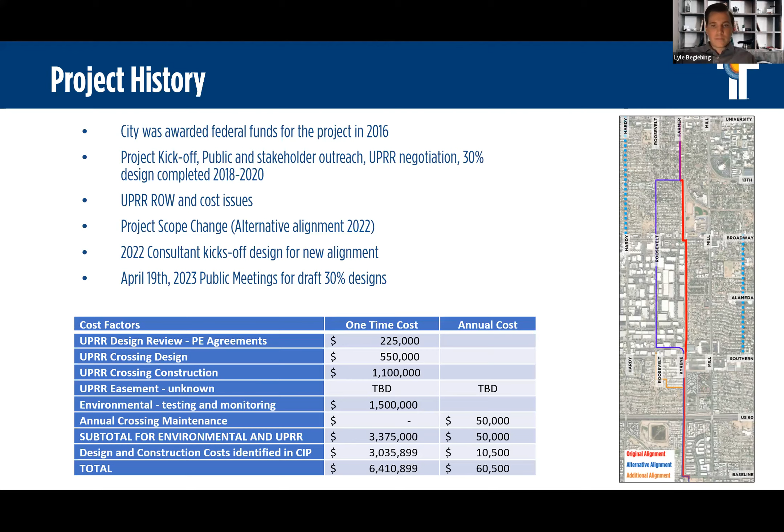Next slide. So here's a general overview of the area this project covers. It starts at University and Farmer on the north end, goes down to 13th Street, and that's where it jogs over to Roosevelt, continues through Broadway and Southern. Below Southern, it will cut through Dwight Park to Manhattan Drive, and through there we'll go back to the original alignment on Kyrene Road.

The southern end of Kyrene, when it hits Baseline, will connect into the Kiwanis Park and Western Canal Path. The proposed improvements include protected and buffered bike lanes, a two-way cycle track on Kyrene, and upgraded bike and pedestrian crossings, as well as a new signal for the crossing on Baseline. There'll be 1.4 miles of new sidewalk where it's currently missing throughout the project, and all sidewalks will be brought up to ADA standards with directional ramps. We'll also include wayfinding signage, as this will be part of the Handlebars Bike Boulevard route, along with landscape and lighting.

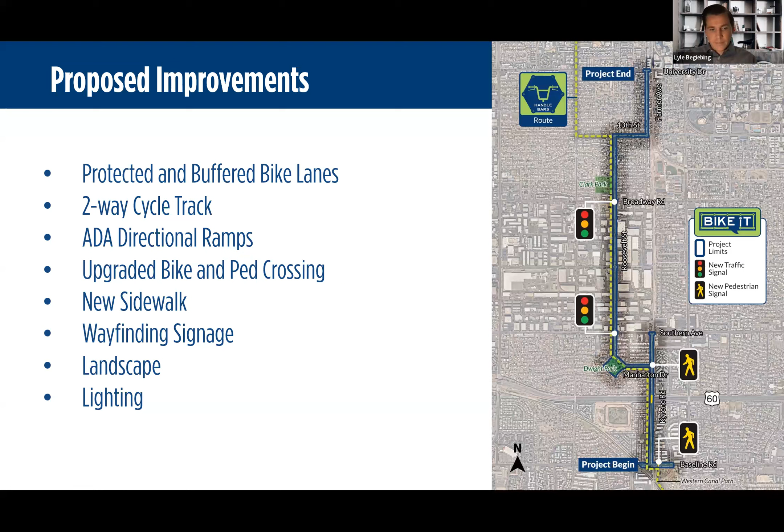Next slide. So the project links many important activity centers and current bike paths and lanes. This will be added as part of the Bike Boulevards route, which is a network of low stress bike routes throughout the city. It'll link Kiwanis Park, the Western Canal, multi-use paths, Clark and Dwight Parks, downtown Tempe, the ASU campus, and will cross the Alameda Streetscape project, currently under construction, which will also feature a pedestrian bridge crossing over the I-10.

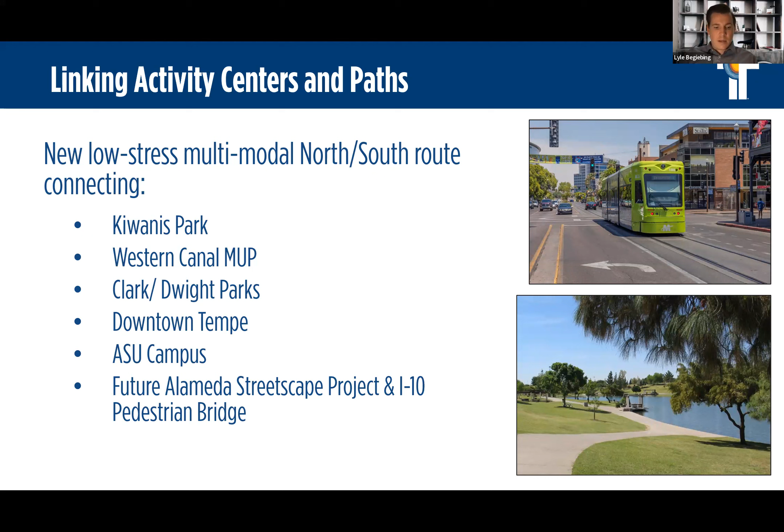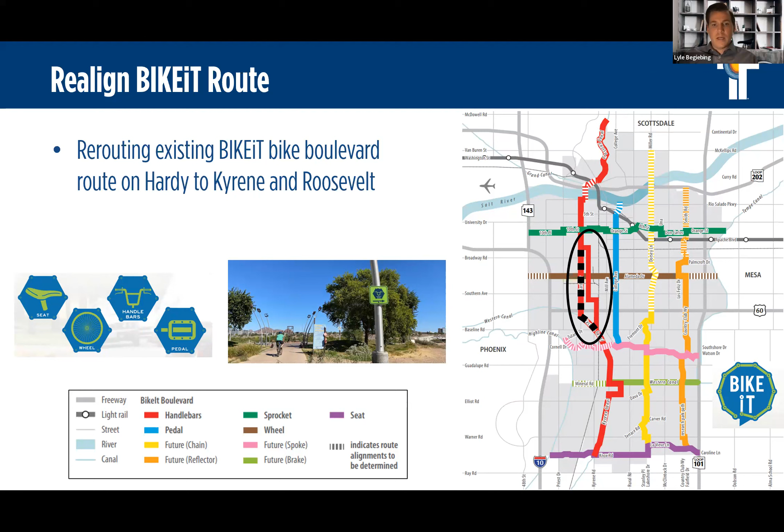Next slide. So here's the overview of our Tempe Bike Boulevard routes. These are the low stress routes going east, west, and north, south throughout the city. The red route is the Handlebars route, the westernmost north-south route through the city. The dotted black line shows the current alignment along Hardy up from Baseline, and the new red line to the right shows how this project will amend that route and provide protected and buffered bike lanes along the Handlebars Bike Boulevard in the future. It'll also include wayfinding signage, as you can see there, for Handlebars.

Next slide. So next we're going to walk through the various cross sections from the project, starting at the north end going south. These are just preliminary 30% design plans. Let's start at Farmer and University. Going down Farmer, there will be little to no change, as there's currently streetscape and traffic calming already on Farmer, and continuing down to 13th it's pretty similar. We will be adding sidewalk improvements to upgrade to ADA standards. And that brings us over to Roosevelt.

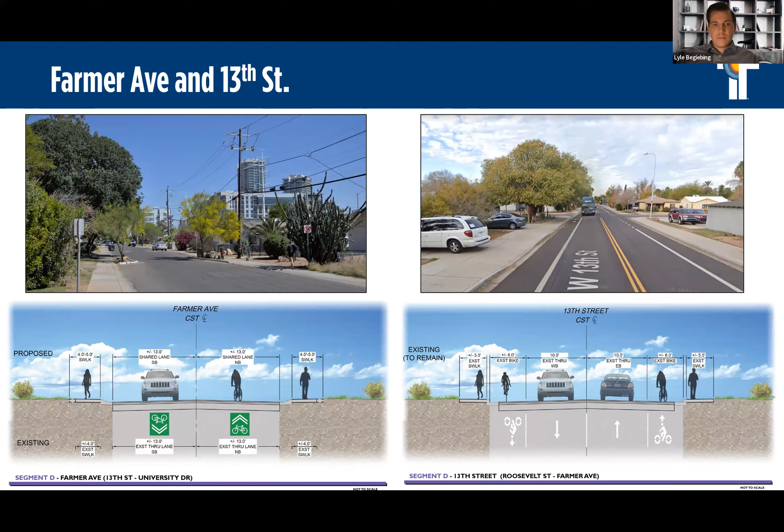Next slide. So on Roosevelt, where the main improvements begin, the project proposes to eliminate the middle left turn lane and add 5-foot buffers for the bike lanes, as well as adding a raised channelization device, which you can see at the bottom right. This will provide fully protected and buffered bike lanes along this route, similar to the original intent of the project.

The area here on the right, you can see there is no sidewalk as well. So this portion of Roosevelt will be upgraded to have full ADA compliant sidewalks on both sides. And as you can see in that picture on the right, there is...

A community art project for the standpipe, and it's going to hand it over to our consultant from Kimley Horn to talk a little bit about that.

All right, thank you, Lyle. Can you hear me okay? Good afternoon, everyone. Yes, as Lyle mentioned, and you can see in the image here in your upper right of the screen, we have an irrigation structure with an artwork application.

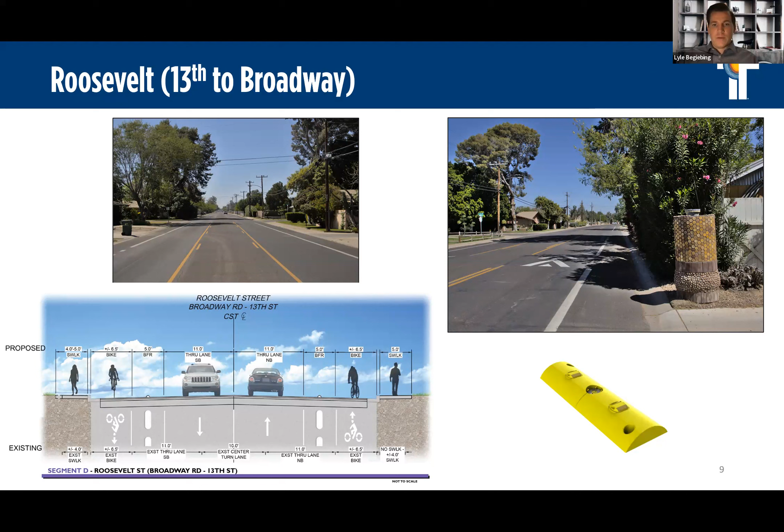Thank you, and yep, so continuing down Roosevelt, we'll move on to the next slide.

South of Broadway, continuing to Southern, there will be proposed buffers, 2-foot to 3-foot buffers with the raised channelization device where possible. There's a good amount of area where the road narrows and the buffer will go away for a little ways, but wherever possible, the plan proposes buffered and protected bike lanes.

Also, there at the very north of that section, just south of Broadway, we will be proposing to eliminate the middle turn lane as well, to provide for those buffered and protected bike lanes.

The bottom left picture there is actually a picture of the Alameda Streetscape project, which is currently in construction. This section of the project will intersect directly with Alameda there, facing west, where once that's completed, you'll be able to continue down there and cross on a pedestrian bridge over the I-10.

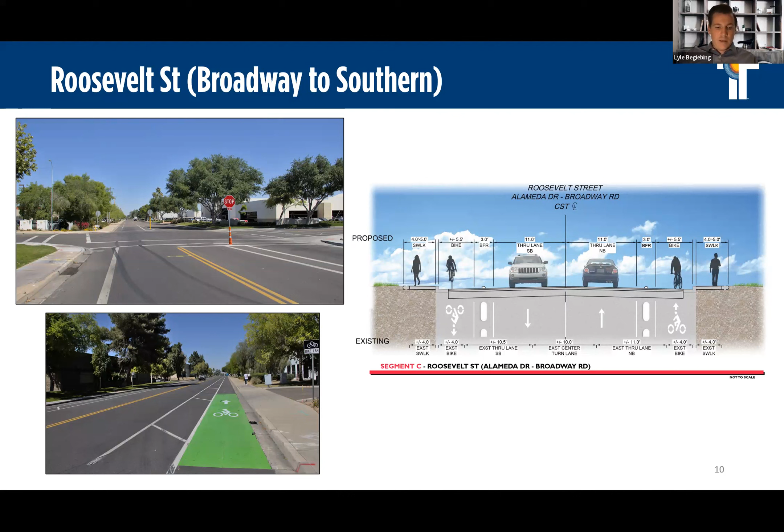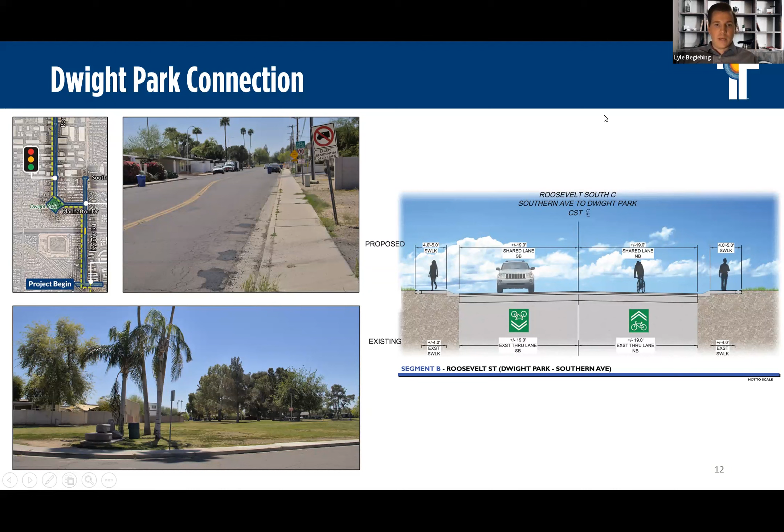The top left image here shows the current proposal for that multi-use path through the park. From the top left is Roosevelt Street, and we'll cut over to Manhatton Drive on the right there. Just a few pictures of the park, and Manhatton Drive will also include sharrows and very wide lanes.

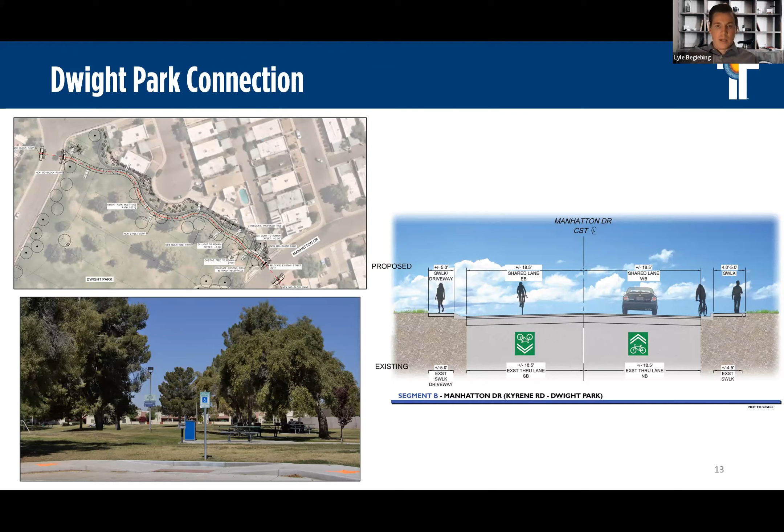From there, that is where we hit Kyrene Road. So Kyrene is a pretty special part of the project because it will include a fully protected two-way cycle track from Manhatton Drive all the way down to Baseline Road.

The channelization device, raised device, will provide a protected bike lane, and there'll be a full 5-foot buffer there, as well as 6-foot bike lanes going each direction. You can see the cross section there on the bottom right.

There's also a proposed new bike and pedestrian crossing at the end of the cycle track to cross over to Manhatton Drive.

And then continuing south, the cycle track will end at Baseline Road, and we have a couple of maps here. In the bottom right photo, you can see Kyrene coming down and jogging over to the right on that yellow line to the proposed pedestrian crossing, and that will link directly to the Western Canal multi-use path. Currently, there is no bike or pedestrian link to that path, so this will provide a great connection.

To Southern Tempe, and the larger map there is just showing the various regional connections that this crucial crossing will allow bikes and pedestrians to access, continuing into Chandler, Mesa, and Phoenix. The top right there is an example of that proposed bike pedestrian crossing.

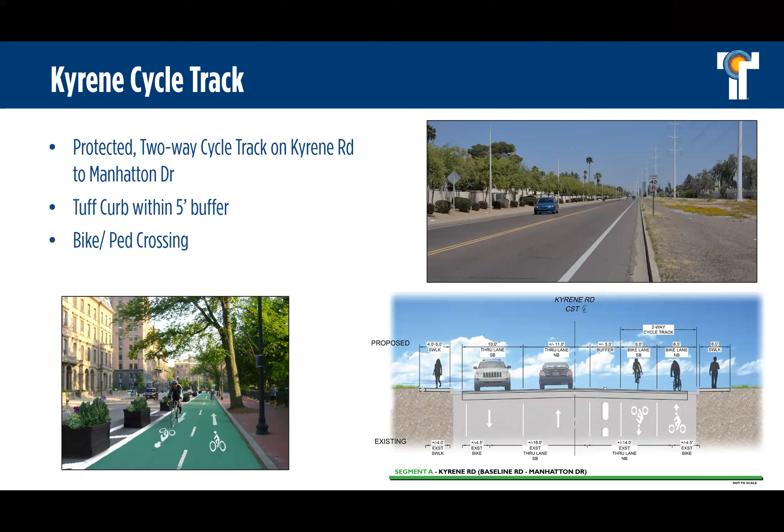But I have a buffer. The bottom right cross section there shows the cycle track. So if you're riding south, you actually will not be on the west side of the road. You'll be facing the northbound traffic, but there will be a full 5-foot buffer with a physical barrier. Okay, and then that next slide shows the transition at baseline.

So again, if I'm going south and then I'm going to go east, to me, according to the rules of riding a bike, I'm riding on the wrong side of the road on my bike until I get to the crosswalk. Is that again going to be a buffered area?

It'll be a multi-use path type connection. So yeah, there will be enough room for passing if necessary. Well, okay, when necessary. So you're not going to be right in the bike lane on baseline, I guess. Correct. Okay, all right, thank you.

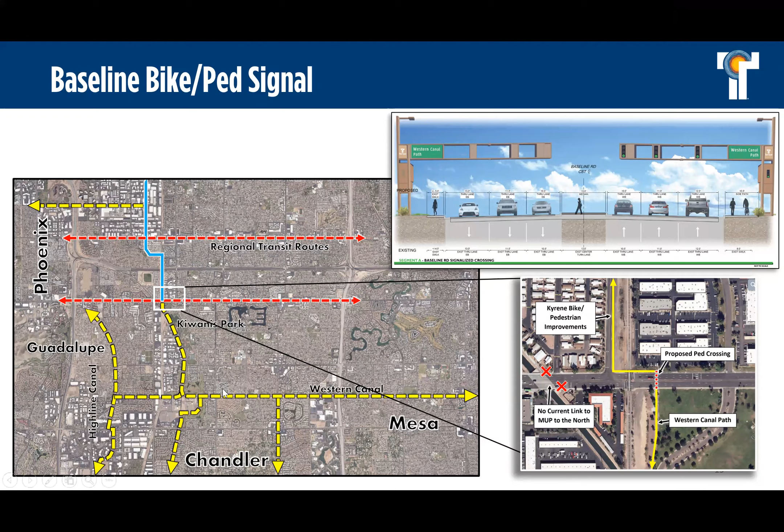Karen Adams. Hi, this looks great, especially from where I live now, just off Roosevelt on 15th Street. So this will be a welcome addition to that area of Roosevelt.

My only concern is not with the project itself, but with the fact that at Roosevelt and 13th Street, and 13th Street and Farmer, while there are stop signs, I cannot tell you the number of people who do not stop. I have almost been sideswiped so many times by cars who decide, there's only that one other car there, I'm just going to drive through. I don't know how you're going to handle this, other than perhaps thinking about enforcement, but those corners tend to be dangerous, both for pedestrians, bicyclists, and people in cars. It's really something I think you need to think about.

I realize this is an issue in the valley, people going through red lights, etc. But for people to truly be safe, people are going to have to be obeying those signs.

I would say with the large buffered and protected bike lanes, it should add a large amount of traffic calming to at least that Roosevelt and 13th intersection, which should slow down traffic a lot more than it is now. So that should at least lessen that intersection.

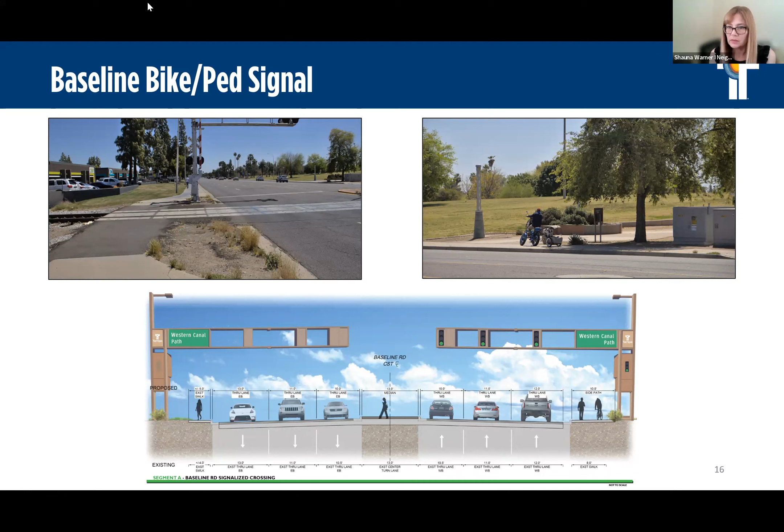As a follow-up, also asking about low-level lighting in the chicanes, maybe using solar. I understand you're talking about reflective paint and other things so the chicanes are more visible, but are you looking at lighting? We have not yet, because this first 30% plan didn't include looking into the lighting yet, but for the next section going to 60% plans, we certainly will.

Katie, you have your hand raised. I had two questions. One, just north of Southern on Roosevelt, there's no sidewalk for a block or two. Will there be sidewalks added there? Yes, that is a section that will have all new sidewalks. The whole project will include full ADA standard sidewalks.

So the entire stretch on Kyrene that doesn't have sidewalks, and those two sections of Roosevelt, will all have new sidewalks. Essentially where there's no sidewalks, there will be sidewalks on this project. And then we'll be upgrading any of the sidewalks that aren't to ADA standards throughout this whole route as well.

For the part on Kyrene, is it possible to have steel reinforced bollards to protect the bike lane? I think those little hump things aren't super protective as a bike lane, and I know people speed a lot down Kyrene, so a real concrete bollard would make it feel comfortable for a lot more people. That was more of a comment.